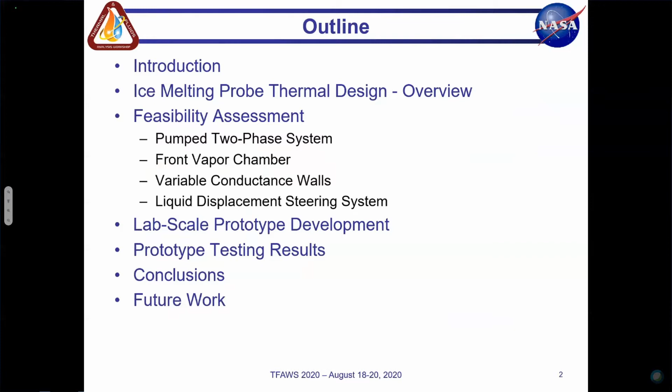So the outline for my presentation today is like this. I'll give you a quick background about Europa mission and the ice melting probe we developed. And we will give you an overview about the thermal management architecture and the feasibility study, including all the features we propose in the proposal. And then I will talk about the subscale prototype to demonstrate the concept. Some selected features will be demonstrated, and I will show a video of testing from that prototype experiment, and draw a conclusion and talk about the future work about phase 2.

Just give you a side note, this program was successfully funded from phase 1 to phase 2, and we are already starting work on the phase 2 program.

So NASA has a very high interest to explore Europa because Europa so far has the highest probability of finding life. And the main reason is that there's a liquid ocean, a huge liquid ocean underneath a thick layer of ice. But to be able to collect the information from that ocean, first thing you have to penetrate the ice and access the ocean. So we need to develop a vehicle that can penetrate the ice that's very thick. I'll talk about how thick that is.

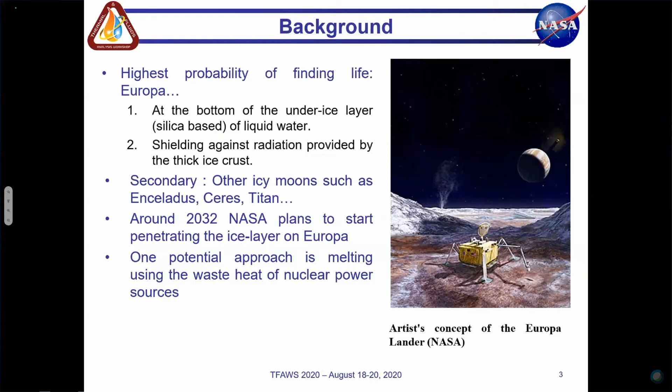And we know there's some active missions so far to learn about Europa, like the Clipper mission will collect more ground truths on Europa. By 2032, NASA expects to start penetrating the ice and start collecting data underneath the Europa ice shell. Not only for Europa, the melting probe we develop is applicable to other icy moons, such as Enceladus, Ceres, and Titan. And we will talk about that too.

So the design requirement for the ice melting probe provided by JPL is like this. The melting probe diameter is around 23 to 26 centimeters. And they want to use the waste heat of the RTG to melt through the ice. The power source will be 32 GPHS modules, and available thermal power on board about 8 kilowatts to 9 kilowatts.

The environmental condition on Europa makes the thermal management design more challenging. One challenge is coming from pressure, because we want to move the probe laterally by liquid displacement, but because the environment pressure within the ice becomes extremely high, we need to figure out a way to provide some lateral steering capability when the pressure of the environment is higher than the critical pressure of the water.

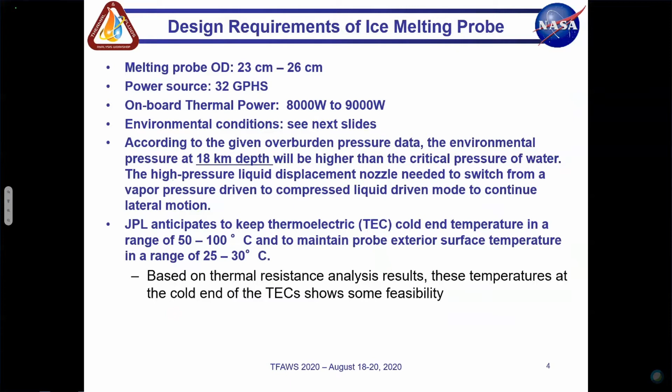And also the thermal management architecture needs to maintain the thermoelectric cold end within the range that JPL set, 50 to 100 degrees C, and the probe exterior surface should be maintained within this 25 to 30 degrees C range. So we have to come up with a very good heat delivery system and management system that will allow penetration of the Europa ice layer.

Other challenge, as you can see from here, the ice layer of the Europa surface is about 40 kilometers and it's significantly subcooled, 100 K. So with that temperature, there's a big chance that the probe will refreeze from the side. Lateral refreezing will cause the probe to be stuck during the melting process. So we have to come up with a way to mitigate this kind of risk during the penetration process. The other challenge will be the probe encountering some unmeltable obstacle like rocks or debris.

So the probe needs to have some lateral moving capability, or you need to develop some steering mechanism so you can change direction of melting without using any moving part, ideally. And the other thing is the melting process will take a lot of time. As JPL predicts, it will take like two or three years to reach the bottom of the ice.

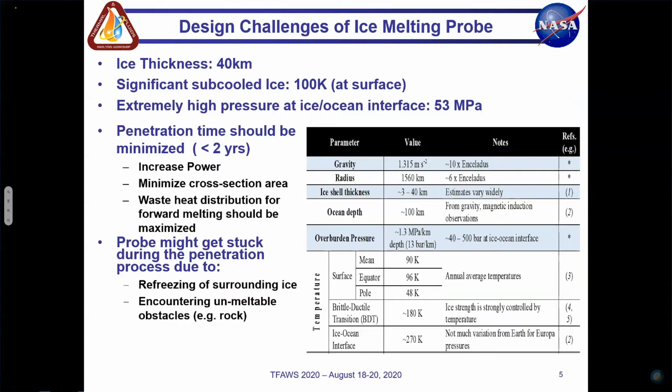The other thing is, during the normal operation, you want to use as much heat as possible for melting instead of wasting heat melting the side. So waste heat distribution for forward melting is very important. That's why we propose to use a feature called variable conductance wall, which I will show in the next slides.

So this slide shows the ice melting probe proposed by ACT, the thermal design. Figure on the left is a detailed design with 3 stacks of GPHS modules. And the first feature we proposed uses the pumped two-phase heat delivery system to collect waste heat from the GPHS modules and deliver it to the front, the nose of the vehicle. Over there's a front vapor chamber.

So the pumped two-phase condenser will have a heat exchange with the vapor chamber, and the annular space between the inner shell and the outer shell of the vehicle will be our variable conductance wall, which is another feature. This is a very important feature. It will provide the lateral melting capability and autonomy capability. And you can see there are 3 pressure vessels; that is a liquid displacement system to provide some lateral motion to change the direction of the probe.

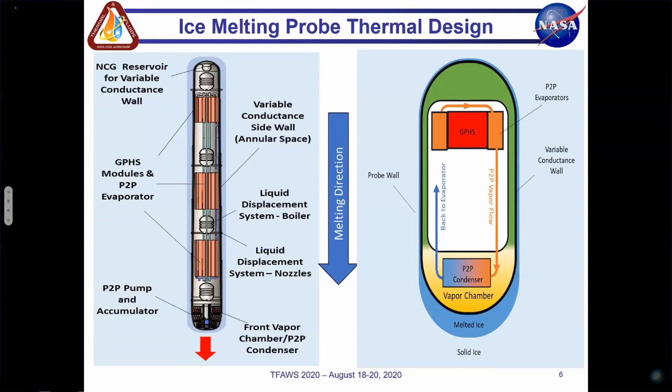So when the probe meets an obstacle, the temperature and the pressure of the vapor in the vapor chamber will increase and push the front upward, so that the heat can go to the ice laterally, so that you can release the probe from getting stuck. Or when the probe meets an obstacle, the entire probe will be heated up by the vapor. And with that liquid displacement system, we should be able to change the direction of the probe and move it in a different direction to avoid the obstacle.

So this slide just kind of repeats, talking about the features. So the first feature is the pumped two-phase system. The reason to have that pumped two-phase system is to minimize the delta T between the thermoelectric cold end and the vapor chamber. And with the pumped two-phase system, you can use a very small amount of power for pumping, and you can provide a very isothermal surface for all the evaporators, and all the loops will have a similar temperature.

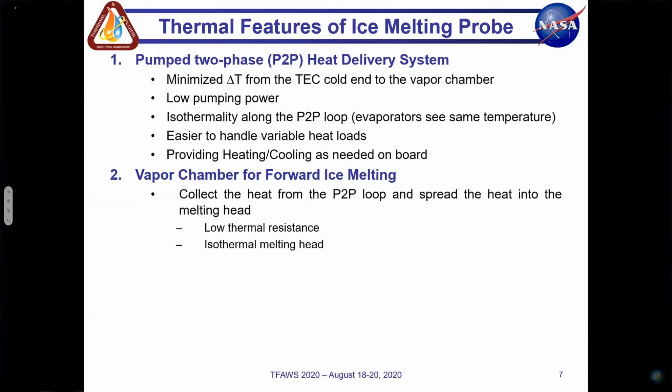And the vapor chamber at the bottom will be the most efficient way to deliver heat to the entire nose. It will collect heat from the pumped two-phase condenser and uniformly put the heat to the front of the vehicle, using a very small thermal resistance. And the variable conductance, just like I said, will offer a passive lateral melting capability when it's needed. When the vehicle meets an obstacle, or when the vehicle is stuck because of refreezing, it will melt laterally without any additional control system. So we call it the autonomy feature for this vehicle.

And during the transit from Earth to Europa, this variable conductance will allow the entire outer surface of the probe to become a rejection surface. So it can remove heat from the entire probe because of the variable conductance wall feature. The liquid displacement system is the system that will allow the probe to move laterally to avoid obstacles.

And we also propose to have a high pressure liquid water jet cutting system to break the ice in the front, so that we can minimize the power to melt the whole ice. In phase one, we successfully demonstrated the feasibility of feature one to feature 4. And in phase 2, we will do some investigation of feature 5.

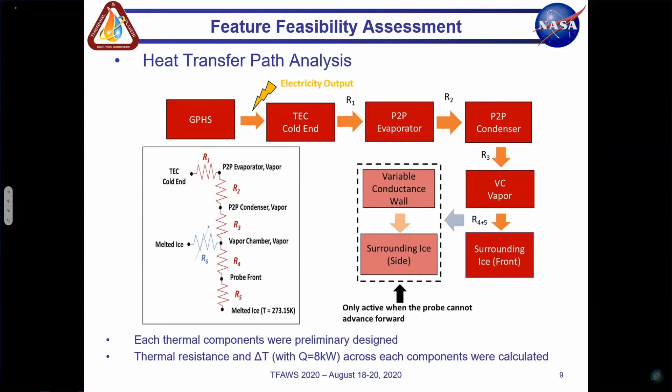So in phase 1, we need to do some preliminary study showing that the concept is feasible. The way to do it is to calculate the thermal resistance, all the thermal resistance within this chain. All the components will be designed, and the delta T resulting from 8 kilowatts of heat.

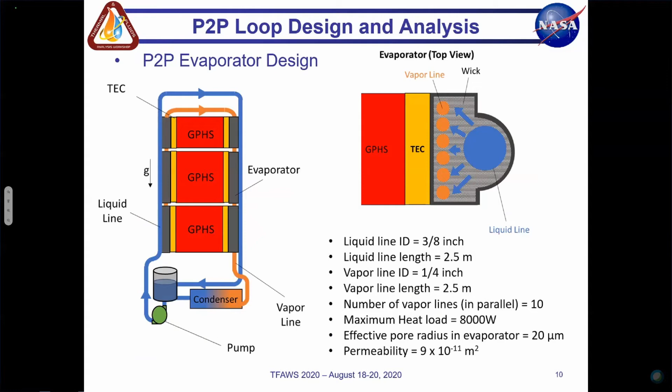the evaporator, taking heat from the thermoelectric converter, and then it will come down and condense in the condenser. And then go back to the accumulator and get pumped back from the bottom of the vehicle. And here are the specs of the evaporator design for this full-scale system.

And this slide shows the condenser, how we engage the condenser, pumped two-phase condenser and the vapor chamber. The copper color in this slide is the pumped two-phase condenser. Each of the channels is actually rings stacking from inside to outside, and there are about 10 rings in here to maximize the heat transfer area.

So vapor coming from the pumped two-phase vapor lines will start condensing inside those copper channels and become liquid. And this rectangular channel will separate liquid and vapor phase due to gravity. And the liquid phase will go into the accumulator and then into a pump, pumping back up to the evaporator.

And the yellow volume in this vapor chamber is the vapor phase. So this is a heat exchanger between the pumped two-phase condenser and the vapor chamber. Vapor chamber vapor will start condensing at the inner wall of the vehicle, and dissipating heat to the surrounding ice with a very low thermal resistance.

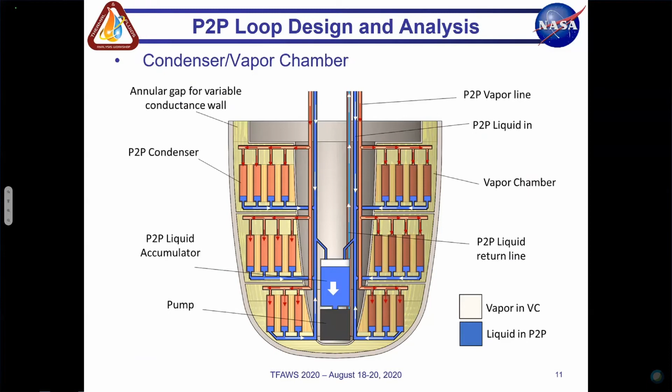And you can see the extension of the vapor chamber is the annular gap, which is for the variable conductance wall. So the variable conductance wall vapor is equal to the vapor chamber vapor. They are the same.

Here's more detail about the vapor chamber design. As you can see in this 3D diagram, like I said, there's a ring configuration for the pumped two-phase condenser. We have a screen for liquid return. The reason for that compartmentalized design is because we need to make sure that liquid can return back from the condensing surface of the vapor chamber back to the outer surface of the pumped two-phase

tubing. The figure on the right shows the calculation showing that the capillary limit of this vapor chamber design is higher than the 8,000 watts of heat, so we should be able to return liquid without drying out the vapor chamber.

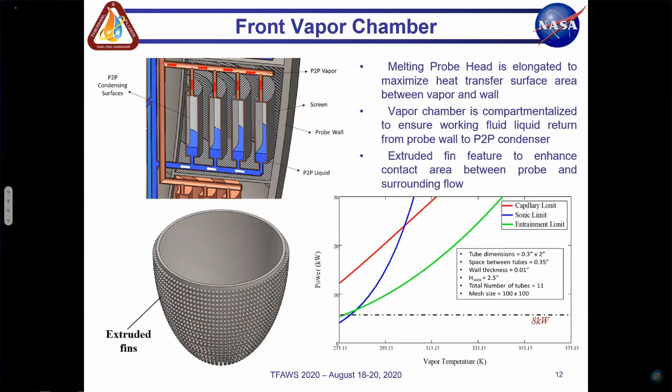And another challenge we identified is that there's a huge delta T between the outer surface of the probe and the environment, because the heat transfer coefficient between those is very low. So to mitigate that delta T, we came up with some area enhancement features. In other words, an extruded fin structure outside of the vehicle that will decrease the heat flux and

decrease the delta T. So this slide is a summary of the thermal resistance from the cold end all the way to the melted ice. The delta T through each component is also listed here. The delta T between the cold end of the thermoelectric and the melted ice is about 61.4, within the range that NASA expected. So this is a good design.

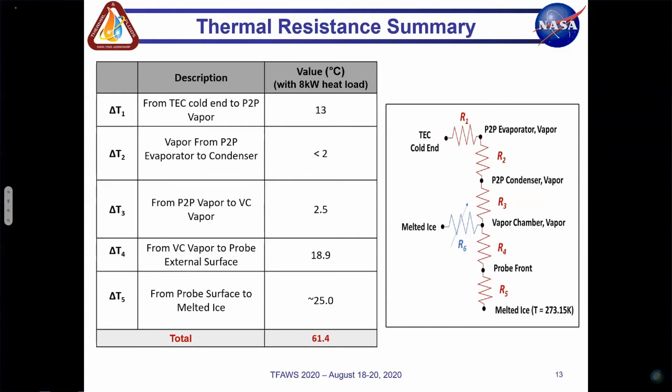We also, through this exercise, identified how we can improve those components. So in phase 2, we will start optimizing each component and further reduce the delta T as much as possible.

Next feature I would like to talk about is the variable conductance wall, which is a feature that will offer autonomy of the vehicle. Like I said, this is the model prediction. When the probe meets an obstacle or is stuck in the ice, the vapor temperature will increase and the vapor-NCG front will be pushed upward. That will increase the surface area for heat dissipation. Then the heat can be rejected from the side of the vehicle and start melting laterally.

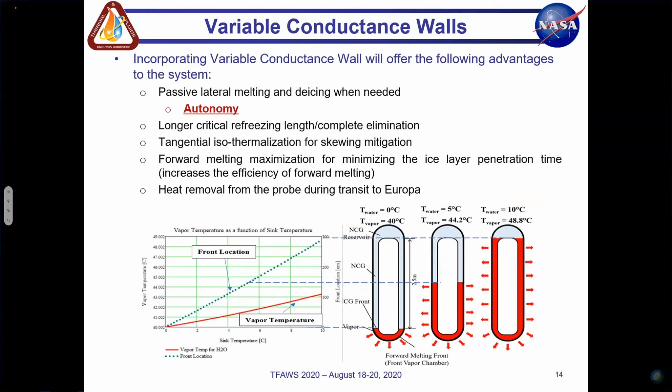This will help the probe to release itself from refreezing. And also, when the probe meets an obstacle, all the surface of the probe will be heated up by the vapor and, assisted by the liquid displacement system, the probe will be able to move laterally and avoid the obstacle.

So the liquid displacement system is shown here. There are several ways we can achieve this lateral motion. The idea is pushing liquid out from a vessel, as shown here. This can be achieved by thermal cycling, heating up by the electric heater, cooling by a cooling coil. That will generate vapor to push liquid outward. And by controlling the valve, we should be able to change the direction of the probe.

But as I mentioned previously, the environmental pressure of the Europa ice will be significantly large as the probe sinks beyond 17 kilometers. The surface pressure will be higher than the supercritical pressure of vapor, and at that moment you are not able to generate vapor within the vessel. So in that case, we will be changing the concept into a compressed liquid instead of pressure-driven. It becomes a compressed liquid-driven process.

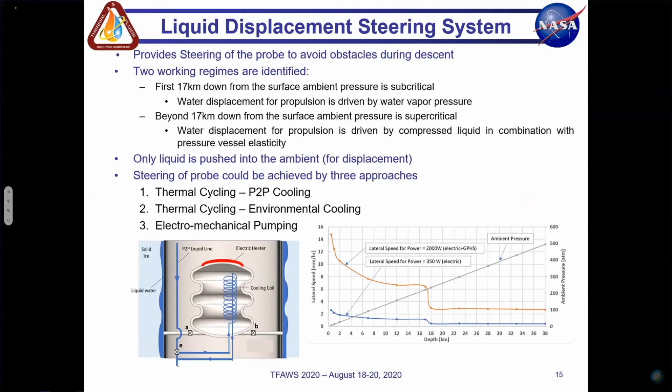And the figure on the right shows some simulation about the efficiency of lateral motion using different methods. So that is the feasibility study. Now I'm going to talk about the lab scale prototype developed in phase 1. This is the CAD model drawing showing the probe size, about 3-inch OD and 11-inch long. We incorporate 4 features in this subscale prototype.

At the bottom is the front vapor chamber, which is a simplified design using just a simple screen to return working fluid from the bottom to the heating surface. The heater you can see on the right-hand side. And the annular space between the inner shell and outer shell is our variable conductance wall. We will demonstrate that feature through the video.

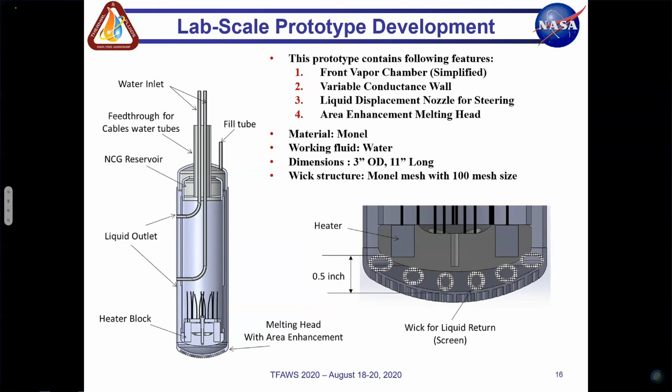And the third feature is a liquid displacement nozzle, or liquid displacement system, for lateral motion. However, we are not able to demonstrate it by experiment because we have a very stiff feed-through at the end of the probe. And at the bottom of the probe, there's an area enhancement feature to increase the heat transfer area between the probe and the surrounding ice.

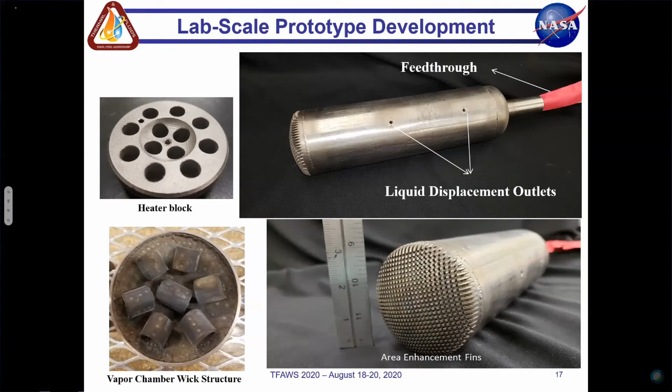So here are some photographs showing the subscale prototype developed in phase 1, including the heater block in the inner shell and the wick structure of the vapor chamber, liquid return, and on the right-hand side, you can see the outlet for the liquid displacement system and the feed-through at the top of the probe for the liquid line, as well as the wiring for the thermocouple and the heater block. The bottom shows the area enhancement fin structure, which is made by 3D printing technology.

To test this probe, we also built an ice system, which is pretty straightforward: a big chunk of ice using 6 panels of serpentines to provide heat guarding. So the temperature of the ice can be controlled nicely using liquid nitrogen. We successfully achieved minus 160 degrees in phase 1. And the figure on the right shows the instrumentation for the testing.

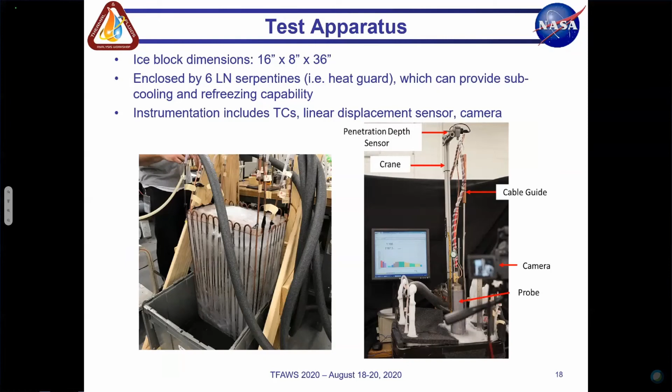In addition to thermocouples attached on the probe, we also have a penetration depth sensor used to measure the length of penetration. And in addition to that, we also have a camera in front of the test setup to capture the process of penetration. So I'm going to show you the video here. This is the picture taken during the testing.

On the screen in the photograph, you can find information about depth of penetration, elapsed time, and the temperature profile along the probe. That is very important information you need to pay attention to, because you can see the functionality of the variable conductance wall during the penetration process.

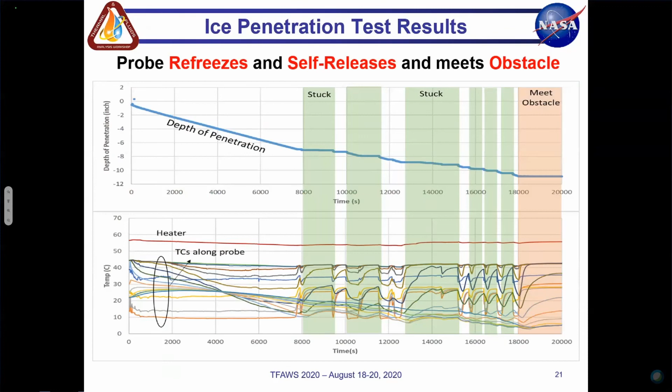And the second test we did is similar, but at the end of the test, we also put an obstacle embedded in the ice, and eventually the probe met the obstacle. And when that happens, vapor temperature starts to increase and occupy the entire length of the sidewall. So now I'm going to show the video.

Sorry for that. Let's try again.

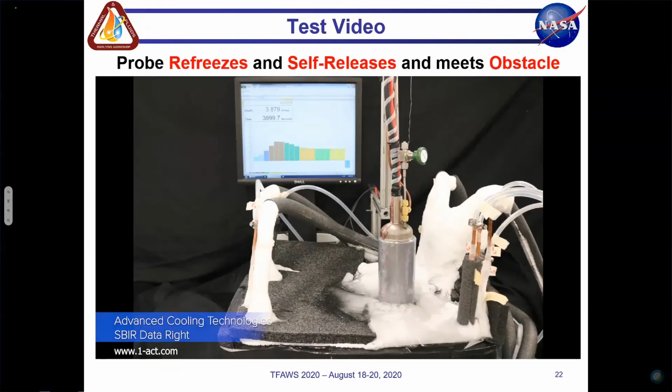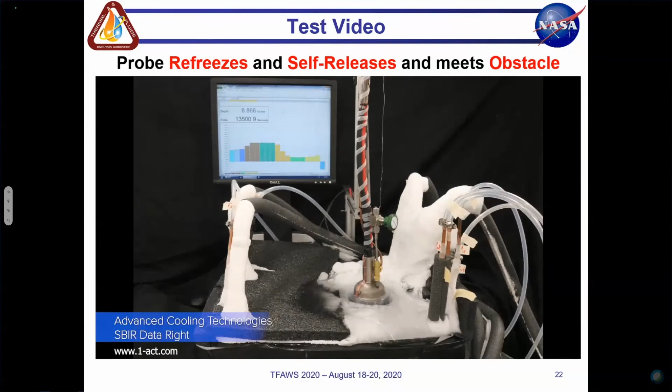So pay attention to the temperature profile on the screen when the probe is getting stuck, you can see the motion of vapor. And also pay attention when the probe is self-released, vapor will drop back and be focused back to the front of the vehicle. And at the end of the test, the probe meets the obstacle and the vapor front keeps pushing up. That is the demonstration of the variable conductance wall.

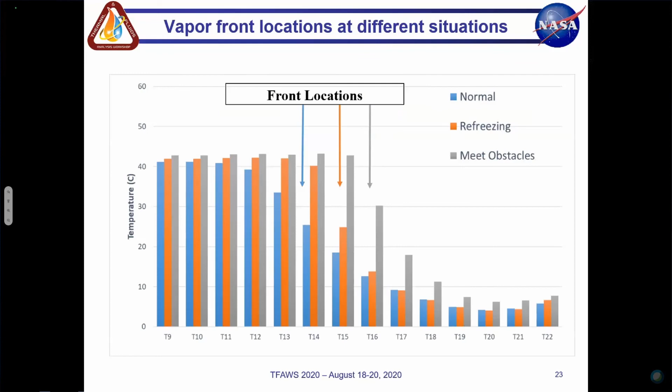And this slide shows the front location in different scenarios. When the vehicle is operating normally, the front is located at TC location 14. And when the side starts refreezing and getting stuck, the vapor front will start propagating and going upward. And when it meets an obstacle, the front location is expanded to TC 16.

So I'm not going to read through the conclusion, but through this SBIR phase 1, ACT developed a thermal management architecture for Europa ice melting purposes. And this thermal architecture involves multiple new features that will help the melting probe melt efficiently during normal operation and also mitigate some risks that can happen during the melting and penetration process.

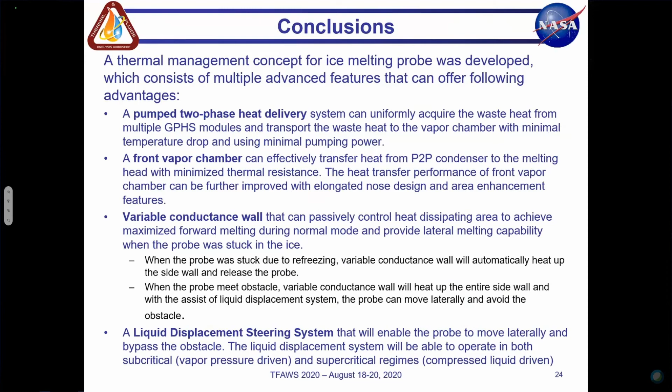Those features include a pumped two-phase heat delivery system, a front vapor chamber, and a variable conductance wall to autonomously change the lateral melting capability and assist the liquid displacement steering system. We are able to move the vehicle when there's an obstacle in front of it. And in phase 1, we did the preliminary design and assessed the feasibility by calculating the total delta T between the thermoelectric cold end and the environment, and that is 70 degrees C. And the path to improve was also identified.

And in phase 1, we developed a lab scale prototype incorporating several features. The most important features include the vapor chamber with area enhancement fin structure and the variable conductance wall. Unfortunately, we have not tested the liquid displacement system, which will be tested in phase 2. And we did some testing using the self-made ice penetration block, and we showed some functionality of the variable conductance wall as well as the front vapor chamber concept.

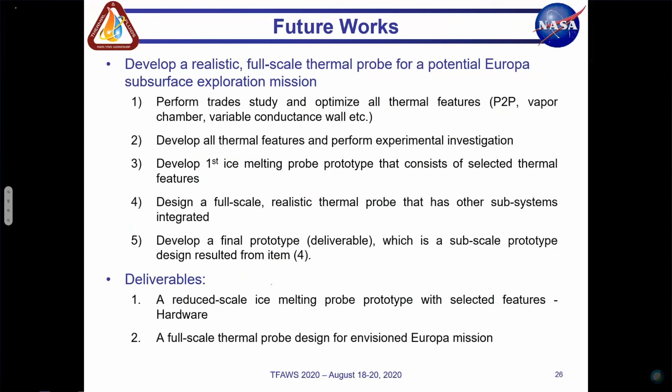So the future work for this program will be a full-scale prototype. We will develop a realistic full-scale thermal probe, optimize all the features, test all the features, and develop at least 2 prototypes at the end of the program and deliver them to NASA JPL for further testing.